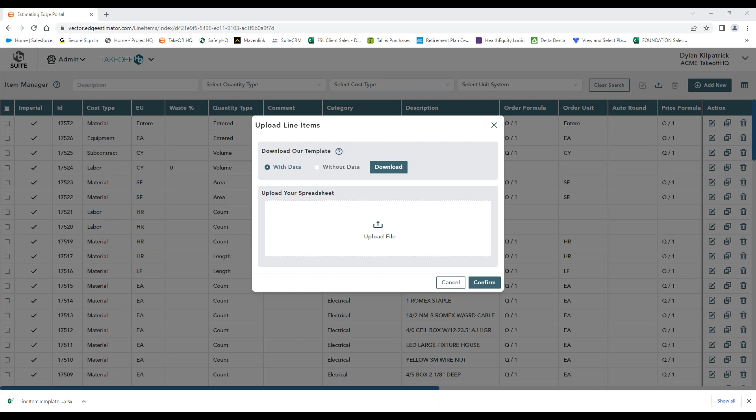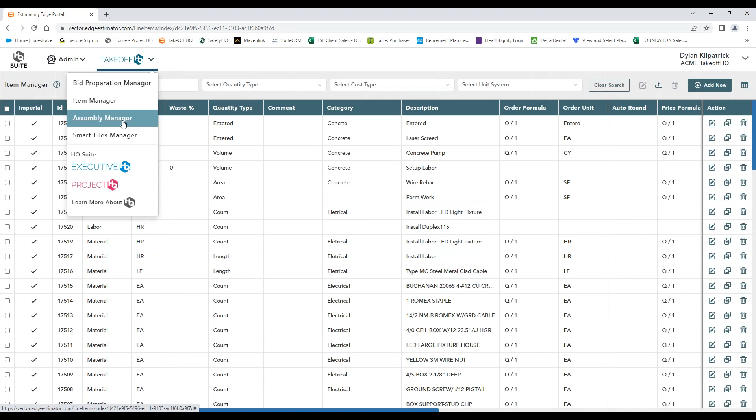We can bulk import items, so I can actually download with data. I'll go ahead and download this Excel file and show you an example of what an import template would look like. If you have a couple thousand items, or even a couple hundred, we can get those all into the system with the upload and customize it to your needs. We then build out those items and assemblies in the system, custom to your needs, and throw those items into custom assemblies, and that's where we get into our takeoff. So I'm going to jump back into the bid prep manager.

I'm going to go ahead and start a bid and show you guys how easy and fast doing a takeoff with Takeoff HQ is. I'll give my bid a name, put in a description, and add the address, city, state, zip code, and start dates. We can choose the units we're measuring on, and then press create bid.

I can click down into the bid, and this is where I'll get into the meat and potatoes of the system. I can put in any notes, contact information, and then work my way down this banner on the left-hand side to start my takeoff.

I'll go to Files and upload my digital blueprints. I can upload a single blueprint, or I'll upload multiple. You guys can upload a PDF that has a bunch of drawings and pull the specific ones into the system. It accepts multiple different types of uploads, and we just press open and add.

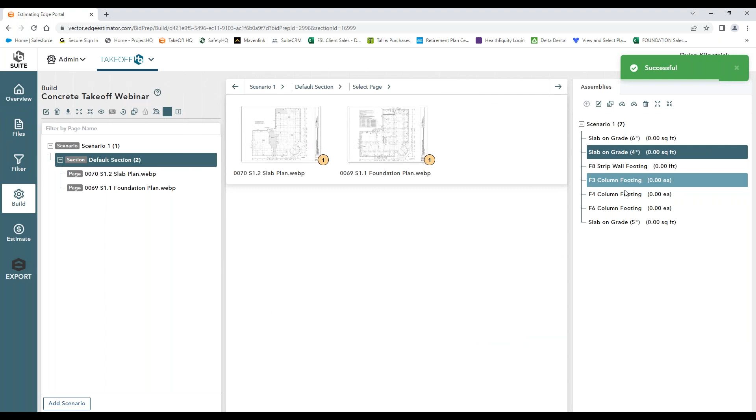If I want to sync that into the database, I can. So you can either choose to just have that available on a particular job, and I can also sync it into the database and push it into my available assemblies moving forward. From there, I would go in and assign my assemblies onto the different pages.

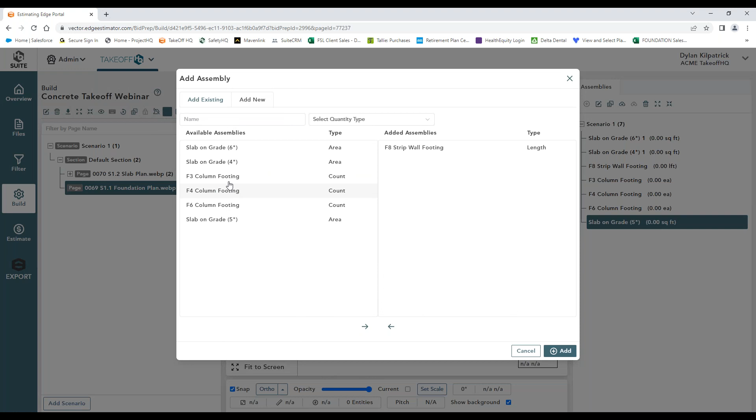Like that, and then I can jump into my takeoff. The first thing I'm going to have to do is set my scale. If you're looking at a plan, it will typically have a specific scale somewhere on the plan that the architect put there.

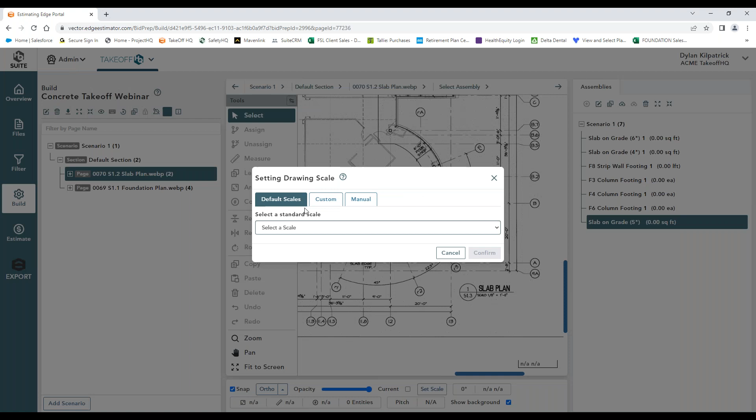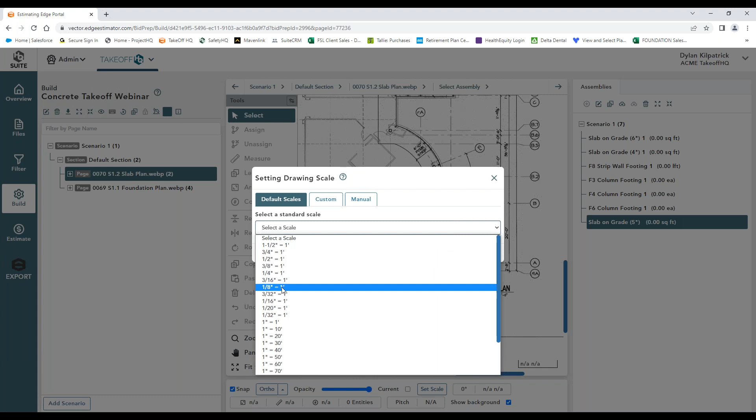We usually recommend that you go in and set the scale manually, measuring a known line so the system sets the scale, just to double check there weren't any issues with the drawing or how it was forwarded over. For sake of demonstration, I'm just going to set a default scale on both of these pages.

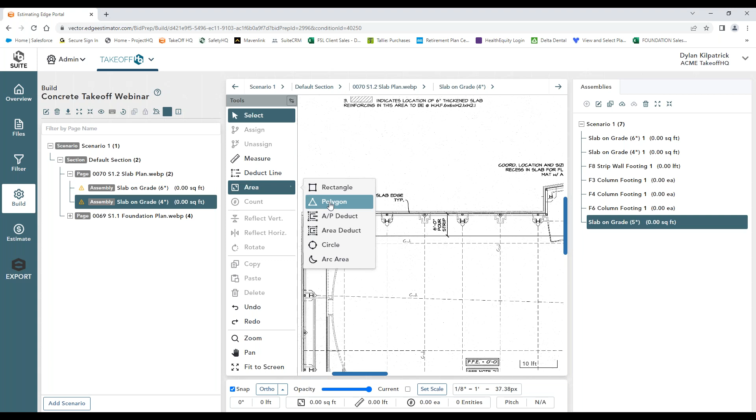Now that I've set my scale, I can start doing my takeoff. If you've used a takeoff solution on other platforms, this will look fairly similar and easy to use. I'm choosing an area calculation and just clicking points.

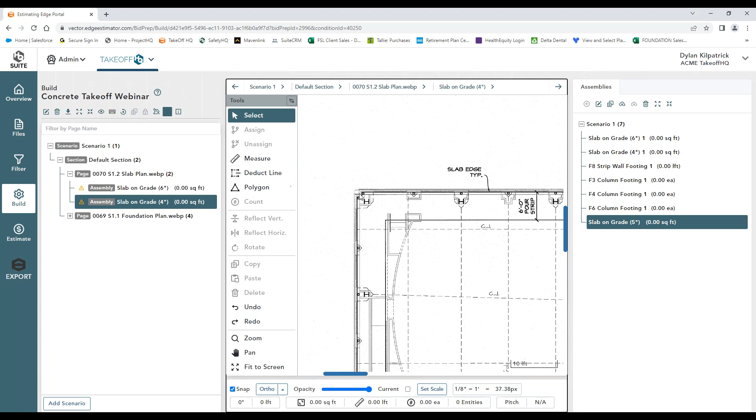If I don't like a point I selected, I can press escape and start over, or backspace and go right into a new line. It's fairly easy to use—you just zoom into the points you're trying to hit.

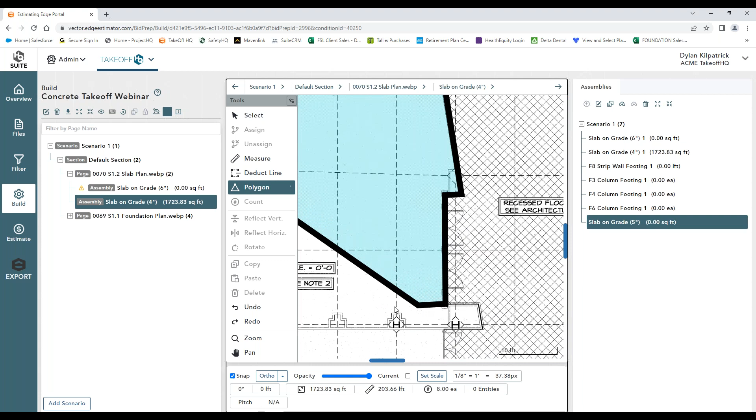So it's quick and easy, doing your measurements on the fly, all in the system. It calculates based on the setups we have in the system. I zoom into my points to make sure I'm getting an accurate point, then zoom out and choose my next line. I can move over, do my points, and do my calculations.

If I'm happy with that, I keep it. If I need to move any lines around, I can choose and move them as needed, and do my area calculations. I can click on another area—going from a 4-inch slab to a 6-inch slab—if there's a spot up here that's a 6-inch slab, I can come in and do that measurement fairly easily.

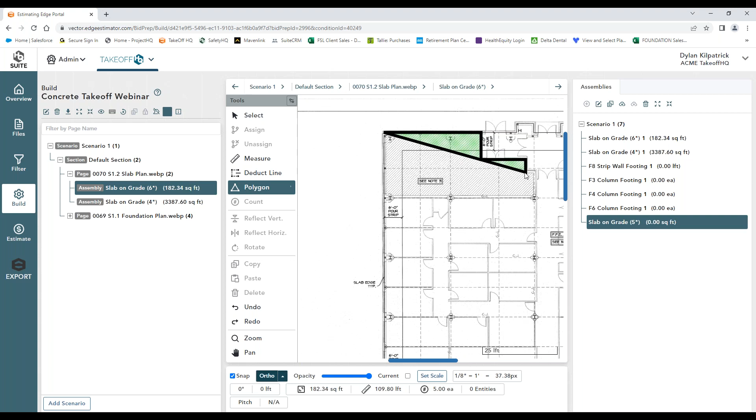On something like this that has a lot of right angles, I can snap and use the ortho measurement, which keeps my line at a straight angle and makes sure the lines are nice and straight for stuff that's pretty perfect like this one. I can make all those selections and go through quick and easy, all while doing the calculations.

You'll notice it's doing square footage calculations over here, and that spits out our material, subcontract, and labor estimates on the other side.

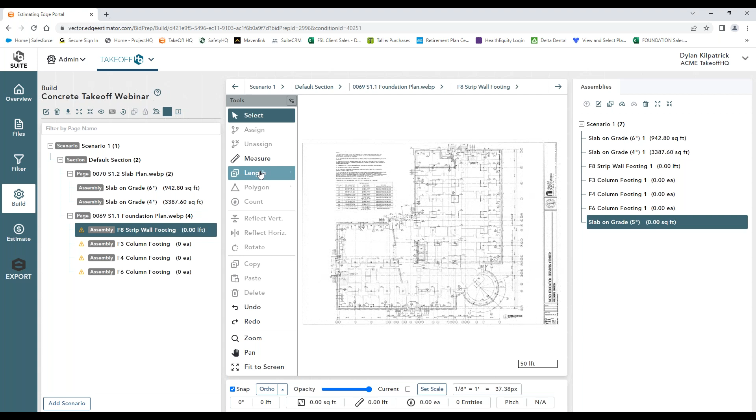The other things the system can do besides area are standard length calculations. So I can come in here and do a strip wall footing, going with a continuous line. I zoom in, choose a point, and drag it across.

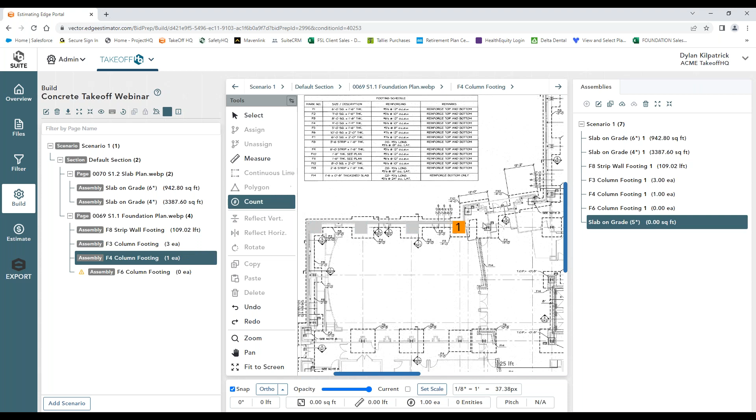And do those measurements. I can also do basic count calculations, which is really easy for the system. So here I have column footings—I can simply come in and mark my counts for basic count calculations based on whatever's in the system.

Now, when I finish my whole assembly and I'm happy with all the drawings I have, I can look and see all the calculations in there, whether it's the slab plan or the foundation plan here as well.

Once I'm finished, I can drop down into the estimate area in the system, and this is where I'll get into where those numbers from the assemblies spit out calculations for ordering materials and the estimate.

I can sort this, typically by type, so I can see any kind of subcontract, labor, material, labor cost listed. If I want to turn specific things on or off on a specific assembly, I can do that, and then I can come into the cost area and change the cost on the fly.

So for a specific project, if we want to kick the price down or up, we can go ahead and change those on the fly. It'll redo the calculations, we save the estimate, and it updates everything for materials and labor down here at the bottom. We can set standard markups from here as well.

I can go into the material area, and you'll see I have a tax markup already pre-built in. I can also add a line item and put in a standard or custom markup on a project by project basis, then press confirm and it'll change those calculations.

I can also put in labor burden, so I can keep track of a markup for labor burden or an overhead markup, and also the profit markup here as well. I can change this on the fly, like going from 10 to 5, if we really want to get this job and mark up the profit a little less.

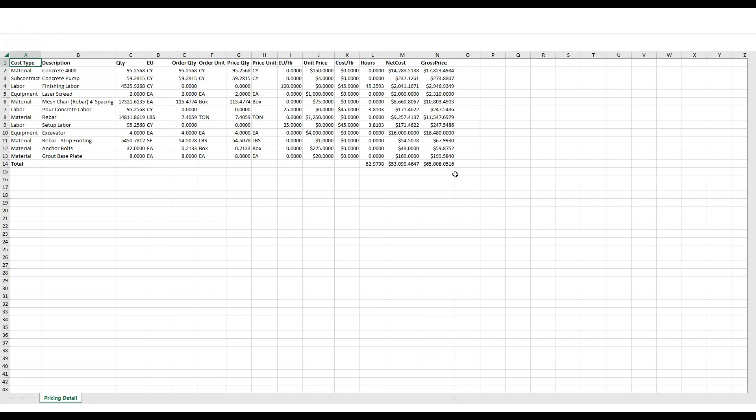So I can see concrete and all my other items built into here, along with their ordering quantities and price quantities. I can go into the system and download a recap so you guys can take that information and build out your bid.

I can see all my materials, any markups, and total costs—total material, total labor, equipment, and so on, contracted price. So you can build that out in the system and have access to it wherever you are.

If you guys need to come back in and make adjustments after the fact, you can come right back in here and make adjustments. This isn't set in stone.

If you guys need to do multiple scenarios and price them out separately, we can right click and use the copy feature up here to duplicate the scenario, and then price out different scenarios separately.

Then when we get into actually pushing the budget into Foundation, we can choose which scenario was the one that was awarded on the bid.

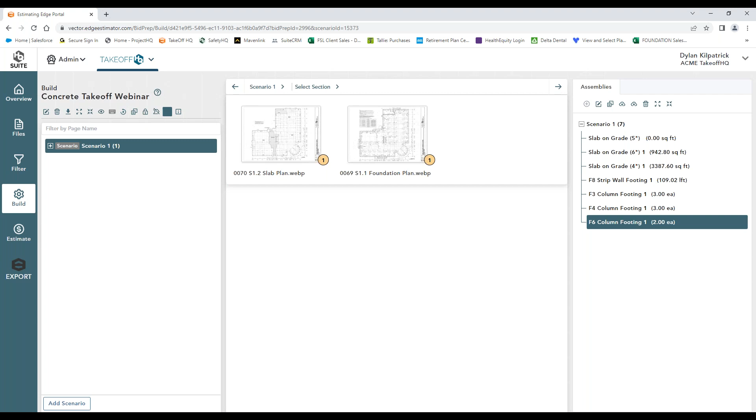Once we're happy with everything we've done in the takeoff, let's say we've won this project and want to push this into Foundation so it creates a project and a job. I can go to my overview screen, and then to my Foundation export.

I can push it into an existing job if I want to, though most people will tend to push into a new job. I can choose the scenario that I want to push, put in my job name, and press export.

It'll take a second to export, and it'll show in the event log so you'll know if a job has been exported or not.

Then I can open up Foundation, and this is where that seamless integration with the cost codes and classes being connected into the items comes in. When you're doing your measurements, they'll flow directly into Foundation via the job budget.

So when we go into jobs, instead of doing a job upload manually or entering it manually through a CSV export and import, we can just hit this validate third-party job. We can choose that webinar with the name I just created, and validate and pull that into the system.

This stops duplicate entry back and forth with the seamless integration. It also helps you guys avoid user error, because typically if you're entering a lot of line items, you can run into a lot of user error.

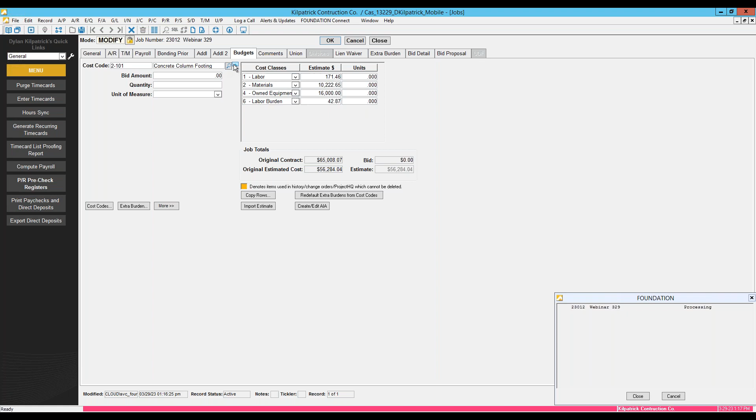So when I click over here to budgets, I'll see my cost codes and classes broken down. I'll see the totals and the breakdowns, even the labor burden breakdowns based off those markups here. I can save that in the system.

It'll validate it, and now that's just an available job in the system. If I hit the dropdown and scroll down, I'll see that webinar budget in there. I assign my customer, and then the accounting side will be able to handle it from there, entering AP invoices,

attaching purchase orders, running payroll, so on and so forth. If you guys are using things like our mobile products, those cost codes and classes that are selected will limit entry in different parts of the system. So if you're using mobile and entering a time card, it'll limit the cost codes to make sure they're only entering against budgeted cost codes and classes.

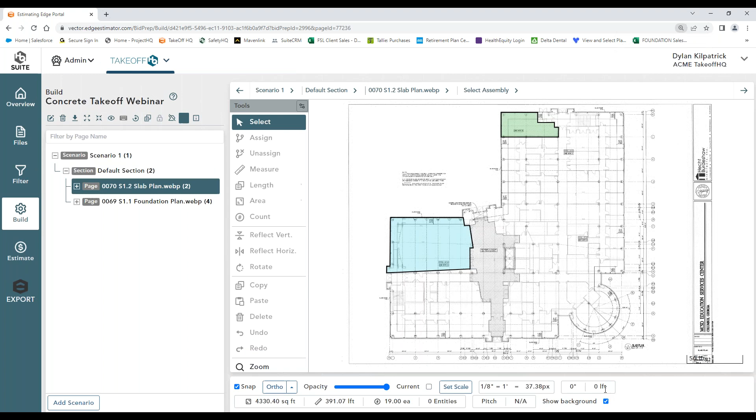So I had one person ask, can we make the view bigger when in takeoff here on the build screen? Yes, I can minimize the assemblies over here, and when you actually get into the builds, depending on the size of your screen, you can zoom in and out and make the screens bigger or smaller so you can see more of the actual build. It's probably better to close the assembly tree so it's a little easier to view there.

Another question here: will it have a seamless integration with other HQ suite items? So Takeoff HQ is just going to link into Foundation. If you have something like Project HQ, Accrue, or Executive, it will have an indirect link to that, because when you push something into Foundation, Foundation will have that indirect link to push out into the other system. So it'll be linked indirectly, but not a direct link that pushes from Takeoff to Project HQ.

Are we able to change labor production values? Yes, we can change those production values in the actual estimate screen or on the item. So you can do those system-wide, or you can do them on a job-by-job basis.